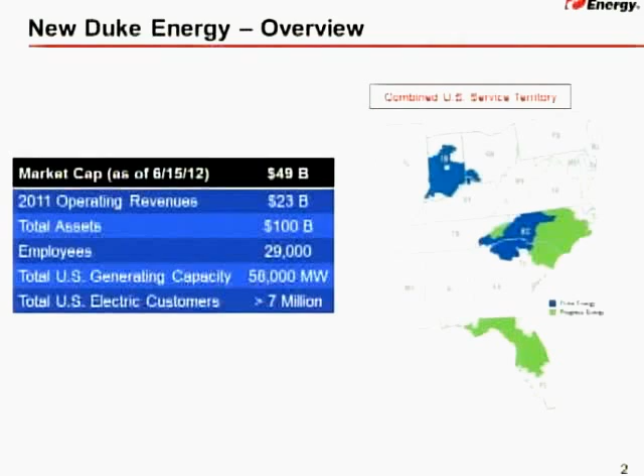Give you a little background about Duke Energy for those of you who may not know who we are. We are a company headquartered in Charlotte, North Carolina. We have recently merged with Progress Energy. Progress was headquartered in Raleigh, North Carolina, to form our new company. You can see the financial numbers there in terms of market cap and operating revenues and assets and so forth. But we have 29,000 employees in our new company. Around 58,000 megawatts of generation.

And really we have a pretty diverse mix of generation. We have nuclear, coal, gas, hydro, pretty good blend overall, gas and coal. A little bit more coal than we have gas, and about 11,000 megawatts of nuclear. We're also in the renewables business, at least a little bit. We have about 2,000 megawatts of renewables generation, wind and solar, across the United States. We're continuing to grow that business a little bit.

We have an international presence. That's Duke Energy International in Latin America, where we operate in 6 or 7 countries down there. Have about 5,000 megawatts there. As the slide says, we have 7 million customers across the U.S., and the map shows our service territory in the U.S. across 6 states.

I mentioned the merger. It's going pretty well. We're about 4.5 months into it now. We are working through the cultural issues that are really beginning. You know, in my experience, a merger of this nature, of this size, it takes quite a few years to really kind of bring the cultures together. We're in the same industry, doing the same business, generating the same product, same types of customers. But exactly how we do things, the nuances, is where you really get into the cultural matters, and we're working our way through that, integrating those cultures.

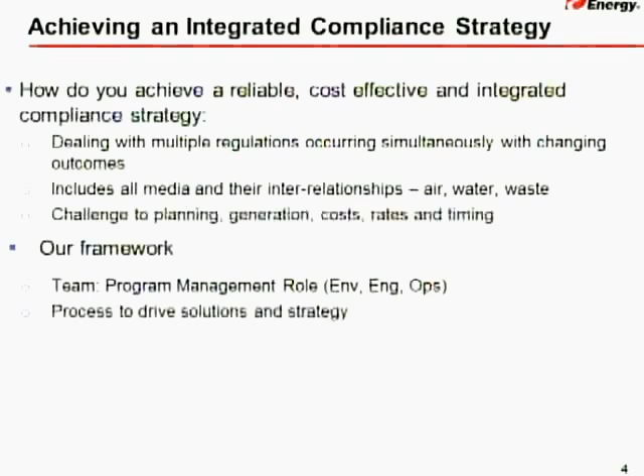I'd like to say we're very fortunate in the fact that I think we've got some very talented folks in our company that we were able to bring together to work on this. And some of the folks are here in the room with me today. I encourage you to seek the Duke folks out and have a conversation with them this evening or through the day tomorrow.

But the team was pulled together to begin looking at this, what was out ahead of us, and to put a process together, a process to drive solutions and a strategy for how do you deal with all these different regulations simultaneously. And this is the process that I want to talk a little bit more about this afternoon. At a high level, this is a summary of that process. This is our compliance planning effort.

But under the assumptions and scenario development, this is where we interpret the regulations and determine possible options and costs of those options and capabilities of those options from a performance standpoint when you're looking at different equipment. We build in, as a second step, the market fundamentals, looking into the future around energy prices, fuel prices, and so forth. We make sure that's baked into our process. Then we do screening models. The screening models really determine the optimal method to make sure that we're outfitting our units correctly, the most optimal approach that we can come up with.

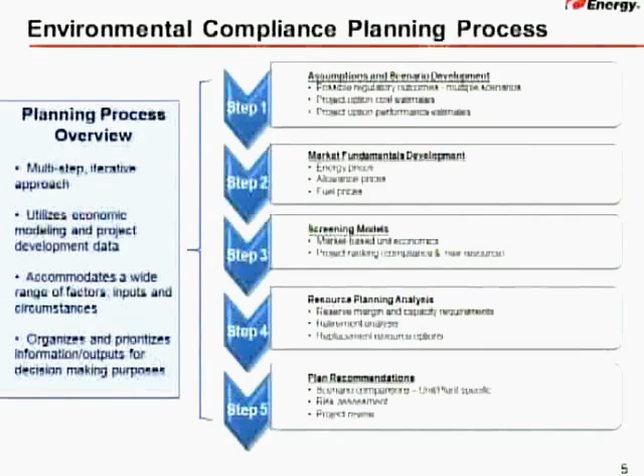And then finally, we come up with a plan recommendation that is designed to determine the least cost, the most feasible plan that considers all the different factors, including the political realities that we deal with around things like rates and so forth. So what I'm going to do is spend a little more time talking about each of these 5 steps this afternoon.

So under the assumptions and the scenario development, interpreting the regulations, kind of reading the tea leaves, we get involved with that early on. Before the regulations are even proposed, we're looking at what's coming down the pike. We're trying to influence that as well through our company, through industry associations and whatnot. But we're getting a glimpse of what the future might look like from a pre-rule standpoint.

Then the rules are proposed. We go back and look at the proposed rules and how they may have changed from what we thought it was going to look like. And then the final rules when they come in, just like MATS did. And MATS changed significantly from when it was a pre-rule and what we thought it was going to look like to the final rule. And that made a huge impact on our compliance strategy around that.

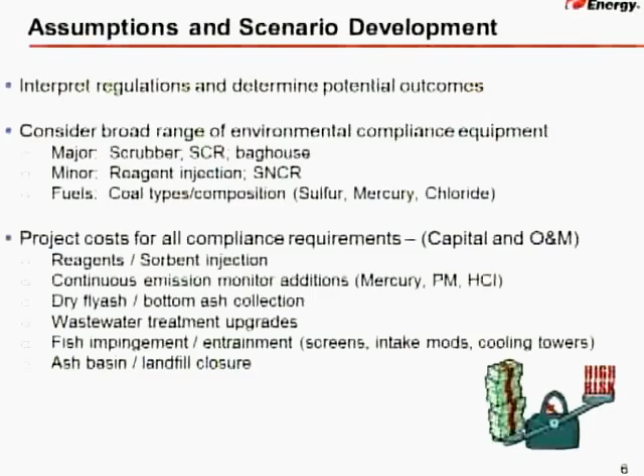As part of this step, we also began considering the broad range of equipment that we need to put on. What's the major pieces of equipment? Scrubbers, SCRs, bag houses. The minor stuff, chemical additives, reagents, and so forth. What types of coal are we going to be burning? We heard earlier in one of the presentations about the differences between the coal makeup from the different basins across the U.S. So, looking at that around sulfur, mercury, chlorides, things of that nature.

Then we start projecting the costs of all these compliance requirements, the capital investments, and the O&M investments. And the O&M investments, we're looking at fixed O&M and variable O&M. You know, fixed O&M like resources of staffing and so forth that you're going to have on site to operate the equipment. Variable O&M, what kind of chemicals are you going to use? Somebody talked about the coal variations as a variable O&M. These are the things you start looking at.

So reagents and sorbent injection, continuous emission monitors, how are you going to deal with your ash? What kind of wastewater treatment options are you going to have to deal with? Around 316B, because we're looking here at all the different regulations, not just the air regulations. So what will we do with regard to fish impingement and entrainment? Screens, modifying our intakes, doing studies to deal with that. And then, of course, ash basin closures.

And as we've looked at this, the ash basin closures, after we're down the road a little bit on our air initiatives, the ash basin closures are going to be extremely expensive in our judgment as we go forward. But the bottom line for this step is we really went through the modeling process to put the information together to really bound our different scenarios. A light case, a strict case, and then a most likely case scenario. And it's the most likely case scenario that we took forward to really look at what the costs were going to be.

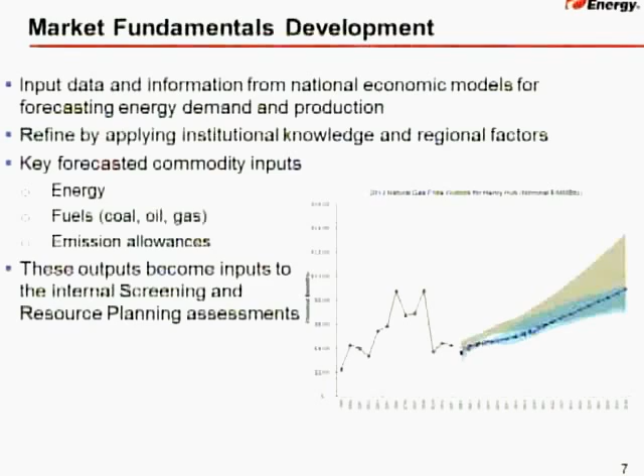But we're looking at the forecasted commodity inputs around energy, fuels, emission allowances, and so forth. What does the future look like with all of that? And then that becomes inputs for the next part of our overall process. This step really helps us determine the value of the asset when it's outfitted in a particular way with particular and specific equipment, and how that relates to the future of dispatching that unit into the future.

And the third step, we're going through a screening process, a screening model, if you will. Again, taking the market information that I just spoke about, but then we're running multiple scenarios through our modeling processes to screen the economics and the new equipment, looking at different combinations, different configurations, what works best for a specific unit. And depending on where the unit is in the United States, the combinations and the configurations are much different.

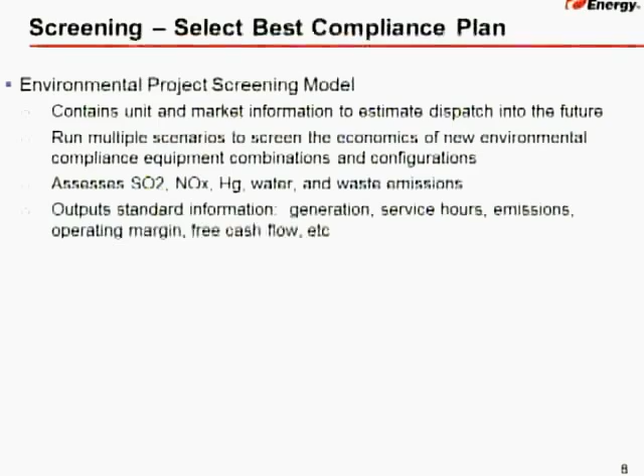We might run 200 different scenarios or iterations around a particular unit, finding different alternatives and alignments that make the most sense. What are the chemical additives that we want to put into the system, and where do we want to inject the chemicals? It allows us to determine the most efficient configuration for a particular unit. It predicts the output of SOx and NOx and water and waste emissions, and it does it in a way that allows us to really understand what's going to impact this unit as we go forward.

The main objective here, of course, is to ensure that the way that we put the equipment on and we run the equipment through a modeling scenario, that it's going to achieve the expected outcome that we need to comply with the regulations. We then hand the outputs of our model over to the resource planning group to do their integrated resource planning to determine if the controls and the configuration that we've identified are really cost effective, or does it make more sense to retire and replace the units with new generation.

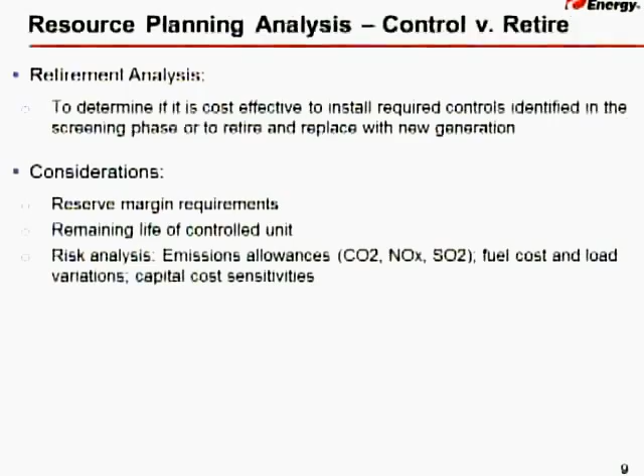They're looking at typical considerations around resource planning, so reserve margins, remaining life of the controlled unit, looking at the various risk analysis aspects of that. But they are looking for the lowest cost, the best option for our customers. Of course, the bottom line is, do you retire or do you control? And then finally, we make the plan recommendation. So the point here is that models don't make decisions, they only inform decisions. And your models are only as good as the information that you put into the models.

At this step in our process, we're pulling all the internal stakeholders together. So we've got our engineering and our environmental folks and our operations folks, but we're re-engaging the folks from fuels and resource planning and legal and accounting, governmental affairs, rates and regulatory affairs, all the different players who are key to help us make the right decision on a unit-by-unit basis. Then we're going back at this point and really verifying again, after we come up with an idea as to what the best configuration is for a unit.

We're getting that information about what's the knowledge that we have specifically about that facility. What kind of operating experience do we have? Are there any specific site-related constraints that we have, construction constraints? Can you really build that baghouse on that site? If you want to put SCR on that site, do you have the space to do that?

We had one situation where we were configuring an SCR and we didn't have the ground to put it on. So at that point, we were deciding to put it up on stilts. And you can think about the costs associated with that, with hovering an SCR above other equipment and the challenges associated with that. But these are some of the things and some of the challenges that we were actually looking at.

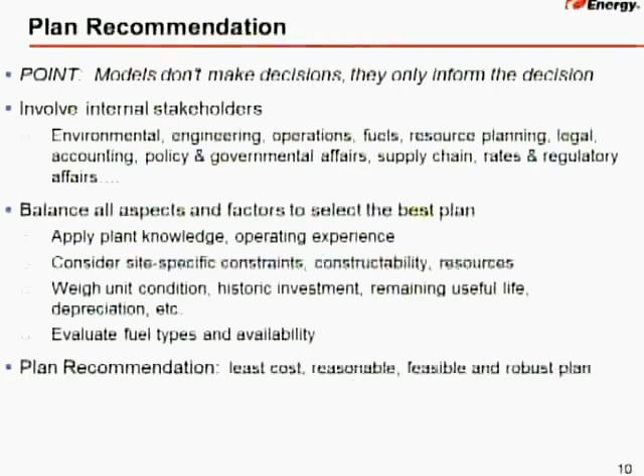The plan recommendation that comes out of this is to find the least cost, the most reasonable, the most feasible, and a robust plan. And when I'm talking about a robust plan, I'm really talking about what is the margin of compliance that this plan for this unit will achieve for you. Are you really close? Or do you have a wide range of compliance there? You need to look at that because you really don't know what's coming down the tracks with regard to future environmental regulations, and that's something you have to factor in.

But you also have to look at the jurisdictional policies and the politics that are going on. It may be different as to what you need to do in Indiana in our situation versus Florida. And you have to look at timing too, as it relates to rate cases and things of that nature.

It's a pretty complicated process. And every step of the way, we have the tools and the means to go back in and run additional iterations, to cycle back and make changes and make tweaks and adjustments as we need to on a unit-by-unit basis, plant-by-plant basis, jurisdiction by jurisdiction. And it's worked really well for us.

Like I said when I started, we still have regulations coming at us. We don't know what the final end game is going to be for many of these regulations. CCR, what's that going to do for us or to us? 316(b), effluent guidelines. With the new administration, still a question mark as to how this is going to play out. Many of us think it'll come pretty hard at us after the first of the year. So things that we thought might be delayed a little bit, like CCR, we think it may come at a faster pace towards us.

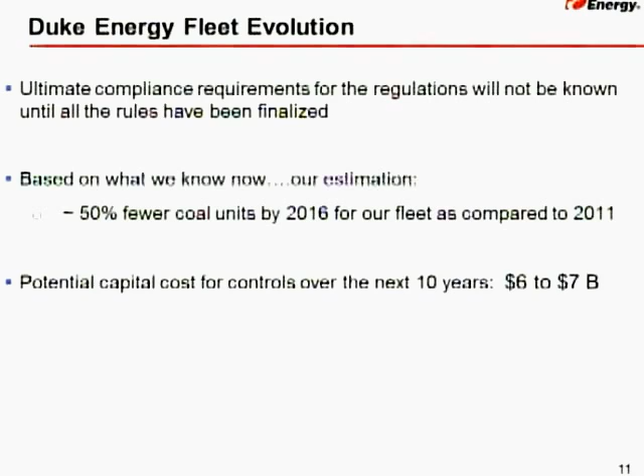We just published our SEC report, our 10-Q, and this is what we had in there. This amount of money was based on the modeling and the screening and everything that I just talked about; we came up with it unit by unit, plant by plant. That's a significant investment going forward, particularly when you look at the fact that probably as of right now, and I'll speak just for the former Duke Energy Corporation, we probably spent up to this point $8 to $10 billion over the last 7 or 8 years coming to where we are today, and the former Progress fleet doing the same sort of thing.

So with that, that's my points for this afternoon. Definitely a challenge ahead of us. We're going to continue to work to do our best to influence these regulations that are remaining, to try to get the most flexible outcomes that we can. But we feel pretty good that our process for determining the cost and what we need to do to put the equipment on has been working pretty well for us in the past. So with that, that's all I have. Thank you.

Anybody have a question? Yes.

Yes. When we retire the units, our plan right now is to fully decommission. That's the path we're on today. Now, I will tell you that at this point, we've probably only decommissioned maybe three plants total of, I'm going to just guess, say 10 units, small units around the U.S. So we've got some experience in that, but our intention would be to bring those units down to ground level, basically, tear them down.

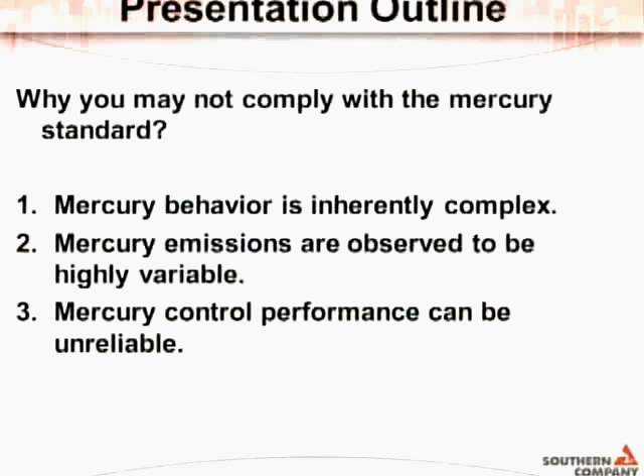Talk a little bit about mercury behavior and its complexity. Now, John had a couple of presentations in the NALCO presentation that had all these equations on it, and I don't want to go there because that would just expose me and confuse you. So I'm going to try to make the complexity part simple, if that's not a conflict there. But there's really two things that we need to think about when we think about the complexity of mercury behavior, or really mercury behavior at all.

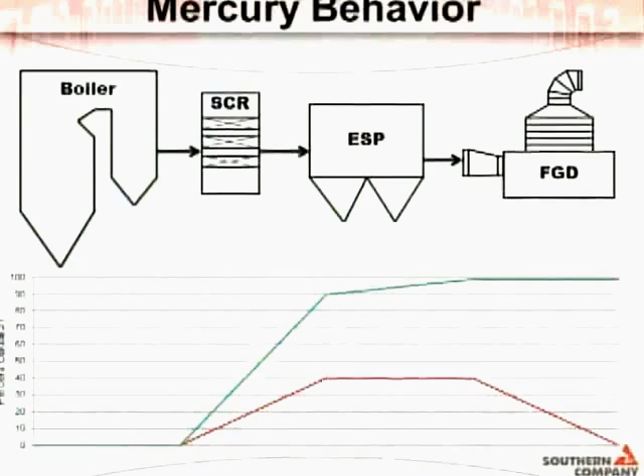SO2 doesn't behave that way, right? SO2 is made in the boiler, and then it just stays SO2 until you get ready to capture it. NOx is made in combustion, and then it just stays NOx until you intentionally do something to change that. PM is released from the coal and stays PM. So we have this odd complexity with mercury that we have to deal with.

So to kind of wrap that up, how does oxidation and capture work? What's really going on in the boiler, as I mentioned? Mercury volatilized into the elemental state, simple. Then the SCR, maybe the most complex piece in the train. What goes on in the SCR is a lot of oxidation, but it's dependent on a lot of variables.

How much halogen do you have in the flue gas? What's your flue gas temperature? What's the activity of your catalyst? How far through the reactor does the ammonia penetrate? There's probably some more, but I think that's enough to make the point that it's really complex what's happening there.

And then the ESP. The ESP can capture a portion of the oxidized mercury. Doesn't mean it does capture it, but it can capture it, and it's also dependent on multiple variables. Temperature, again, plays a role, the properties of ash, how much unburned carbon you have. So you're adding on more complexity.

And then lastly, the FGD can capture oxidized mercury, very good at capturing oxidized mercury, but you have this whole reduction potential going on, the big bad mercury re-emission back to elemental state and out your stack. So the thing that this creates is the reality that mercury capture can range from 0% to over 90% in very similar systems. In plants that deploy the same technology, you can get close to 0% or over 90% control.

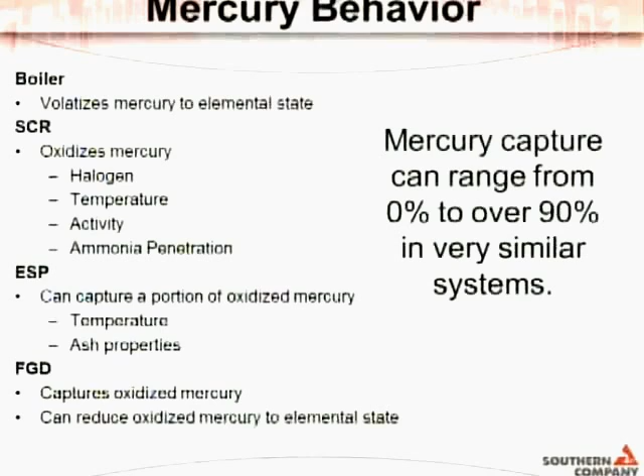And I think that highlights why mercury is different than a lot of other pollutants. There's no plant out there with a scrubber that gets 0% SO2 removal. But there probably are some plants out there with scrubbers that get very close to 0% mercury removal from time to time. So, mercury behavior, very complex. That's sort of my first point.

Secondly, I want to talk about mercury emission variability. If you've had the misfortune of hearing me speak before, this is probably a topic you've heard me talk about. I've carried this silly slide all over the country and bored many people in rooms like these with it. But what we see here is mercury emission data from our units that have SCRs and FGDs. This is CEMS data over several years, and what it shows is the emissions are highly variable.

So what we've done is we've taken actual emission data, and we've calculated 30-day rolling averages, just like the MATS rule would ask us to do, and then we just statistically compare our historical performance to a MATS type of regime. And so you see from plant to plant, there's 7 plants here. We have anywhere from 400 to over 1,000 individual 30-day averages for each plant. If you look at the mean column, the 3-ish year average for all these plants is somewhere less than 1 pound per trillion BTU.

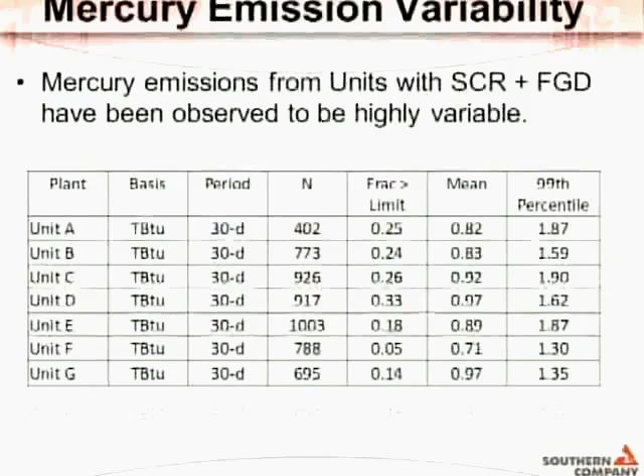That's good news, right? But the other 2 columns are the not so good news. Every one of these 7 plants has had some days in its operating history that are greater than 1.2 pound per trillion BTU. In other words, every one of these plants would violate the MATS limit at some point if we continue to operate them the same way we've been operating them for the last 3 years.

These are not uncontrolled units. These are units burning bituminous fuel with plenty of chlorine, with an SCR, with plenty of catalyst, and a scrubber with plenty of water. And we still are out of compliance anywhere from 5 to over 30% of the time. And what is our maximum emission at those plants? The highest 30-day average that we experience, anywhere from 1.3 to 1.9. So we're not way off, but we're off. And you only have to be off a little bit to create a problem for yourself.

So we observe variability in our SCR and FGD units. The next picture I have here is a histogram, or a distribution of emissions from units with activated carbon into a baghouse. So this is a TOXECON unit. There's actually 3 units here mixed into the data pool, but it's the same thing, historical 30-day averages, just laid out in a distribution. And what you see is, you've got sort of this normal behavior around about 0.8. So on average, the technology easily achieves the standard.

But what we see is this long right-end tail. And that means that we have days, this not normal distribution, where we have compliance issues. And actually, the 99th percentile there is somewhere around 2.25. So we see very similar variability with activated carbon injection that we do with SCR and FGD. So variability isn't necessarily technology dependent, which leads me to believe it has more to do with mercury, less to do with technology.

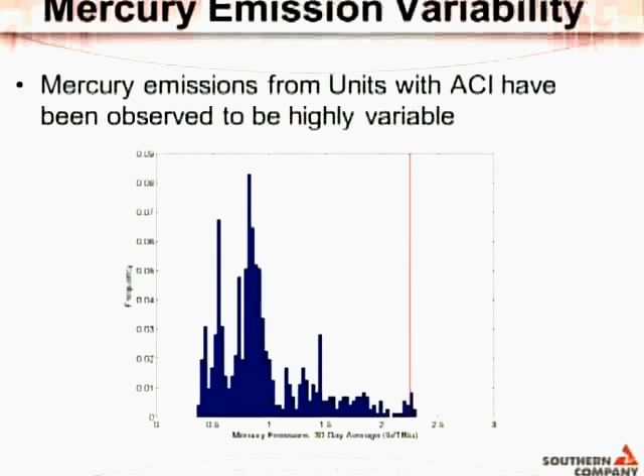The last thing I want to talk about is the control issue. So why would I say that control performance is unreliable? Again, I want to show some performance here on activated carbon, and my point here is that the long-term performance doesn't always follow the parametric trend. So if you've been to a lot of mercury conferences or environmental controls conferences, you've seen enough parametric trends of activated carbon injection that you could draw them in your sleep. You increase injection rate, you increase performance, or lower emission, depending on how you label the y-axis.

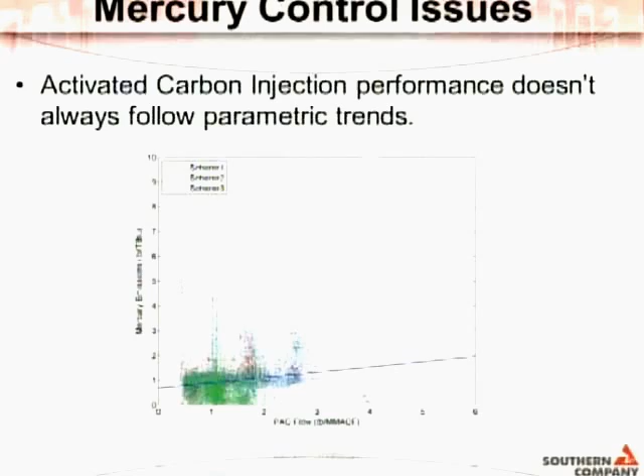Well, what we've observed is that if I want to hit a 1 pound per trillion BTU-ish emission, it takes anywhere from about a half a pound per million ACF of carbon up to close to 3 pounds. And now why is that? I don't know. It's not fuel mercury. Everybody wants to say it must be more mercury in the coal. It's not that. This is consistent PRB coal. The range of mercury in the fuel is very tight. So it's other things, it's process things that drive variability, that make parametric curves only true for a small moment in time in which they were taken.

You could also look at it, well, what happens if I just always inject 1 pound per million ACF? Well, in that case, I have emissions anywhere from 0 to over 5. So if you just hold your injection rate, you might be good most of the time, but you see the scatter of dots up the graph. So we see these problems with long-term performance.

Talk a little bit about FGD mercury capture, and this was hit on in John's presentation earlier. It's really complex what happens in a scrubber. I'm a mechanical engineer by training, so I don't understand it all, except you've got these multi-paths of what's going on. You've got some mercury that just passes right through the water. The oxidized mercury gets absorbed, but then it goes and it starts doing all kinds of things.

It can report to the solids in the scrubber. It can stay in solution, and whether it does one or the other, it may or may not reduce. If it's reduced, it may come out of the scrubber. All kinds of stuff goes on that makes it very difficult to predict what is the true capture across an FGD. Remember, 0 to 90%.

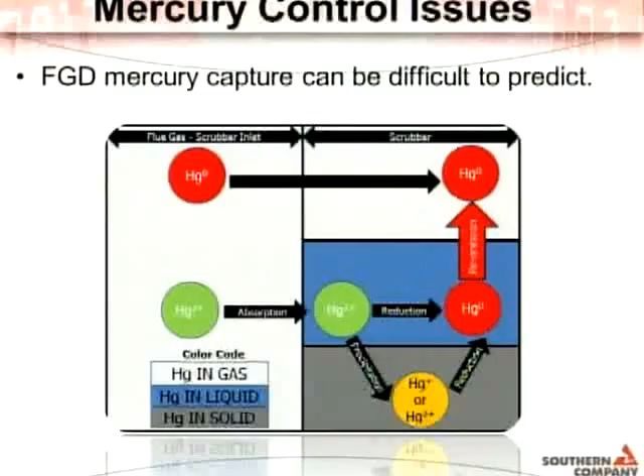So this is a complex sort of thing that's inherent in the control itself, which leads me to the next point, which is that mercury re-emission is a significant issue. It's real, and I'm not sure that there's a proven commercial solution. Again, I'm not saying that any of the technologies that you might hear about here today are bad technologies. I just don't know if any of them are fully proven out yet.

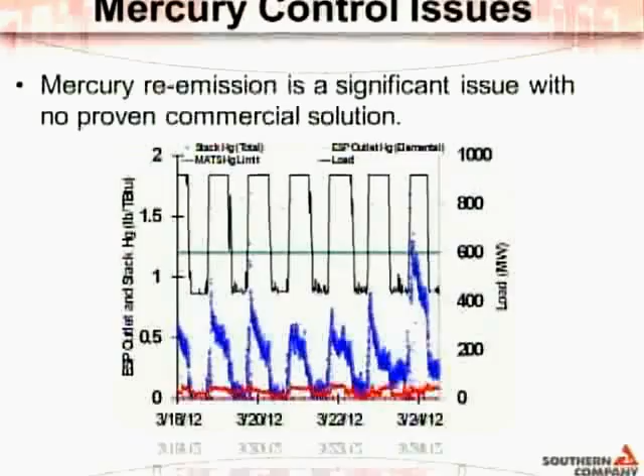This is just a slide that shows mercury re-emission to show that it's a real phenomenon. It's not just something that is academically discussed. But you see the load is the top dark line. So you'll see that the mercury emission actually follows load. The bottom line, there's little dots at the bottom you can't really see, which are ESP outlet elemental mercury numbers. They're almost zero, which means if you're capturing all the oxidized mercury, your emission should be essentially zero.

But you don't. You see this daily peak where you actually have significant emissions, which is re-emission. So we see at this site for this week significant re-emission every day.

Talk a little bit about re-emission technologies. Not very straightforward. We applied a re-emission technology. It's not important what technology it was. Again, it's probably a good technology. This demonstrates that there's some things to be understood about it. You can kind of see to your far left this first re-emission event that goes up to about 6. The inlet mercury to the scrubber is about 6. So you see this event where all of it's re-emitted.

Well, then we start adding the control technology. And because we weren't doing it right, whatever right is, we had these wild re-emission events. So my mercury control technology actually increased mercury emissions. That is a problem. In fact, it didn't just make re-emission the same as it was before. It made it 2 times as bad as it was before.

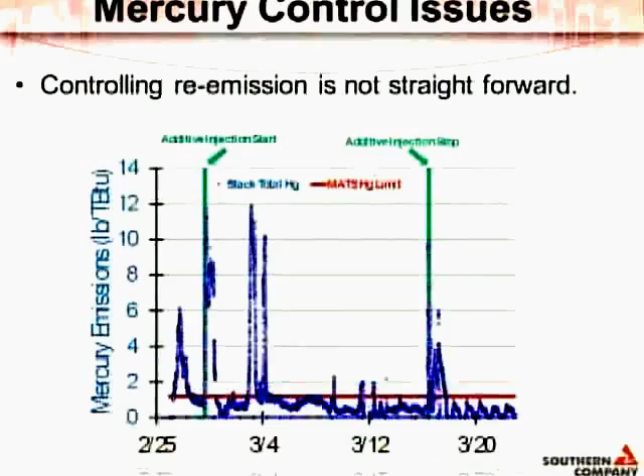Now you see plenty of time period during the control where emissions are really low. So the technology probably works if it's done correctly. And the point is we got to figure out how to do it correctly because it's not straightforward. These aren't technologies that you just turn on and head to the house. So re-emission technologies might not be straightforward.

So what do I want you to take home from this presentation? What's my conclusions? I got 3 here to think about. First of all, you'd be well served if you understood your emissions profile. And that's not very easy because I showed you emission profiles where one plant was above the MATS limit, not really out of compliance because it's data from a period where there was no compliance limit. It was over the MATS limit 5% of the time.

So if you went out and tested, 95% of the time, you would think that you were fine, you were in compliance, your technology was working. Even the bad performer, 60%, 65% of the time, you would think you were okay. You really have to somehow be able to understand what that whole profile looks like.

We had this great resource because we installed mercury CEMS several years ago, so we have gobs of mercury data. I understand a lot of people don't have that, and so you got to somehow figure out how can I really draw that picture? How can I understand what the true profile is? Not just what it looks like today, not just what it looks like for this week, but what is the real profile? What is my minimum and maximum emissions?

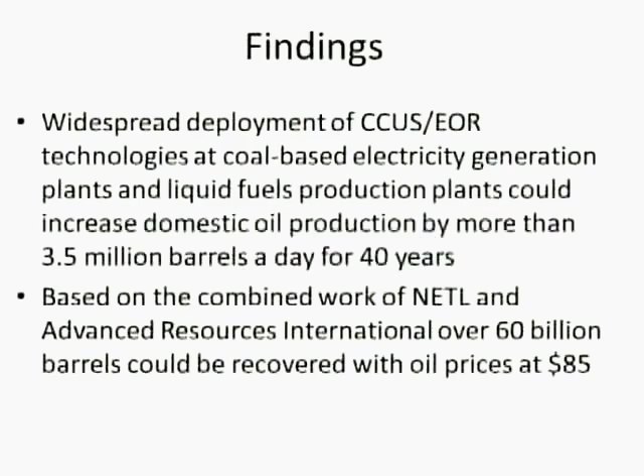And you know what? About 70% of all the oil that was there then is still there. They only took the easy part. John D., you know, when he was living in New York and arguing with the railroads on moving his oil around, Standard Oil of Ohio and all that stuff, it just took the easy stuff. When it got tough, they went down to the easier, more sandy, more porous soils down in Louisiana, Arkansas, Texas, Oklahoma, etc. So we think there's still a whole lot of stuff there.

And at $85 a barrel, we think it potentially can be recovered if you capture CO2 at power plants and put it in the ground and push up the oil, okay? They've been doing it. Denbury, who was a big player in this particular study, has been doing that for about 40 years. They have an excellent business model. They make a lot of money doing it down in the Texas, Louisiana, Mississippi, Arkansas part of the world. But they'd like very much to do it in Ohio, Indiana, Illinois, West Virginia, Kentucky, et cetera.

Because why? What constrains the whole process of enhanced oil recovery is the limited availability of CO2. We just don't have it. And what they use now, they mine. They actually dig down, bring it up, pipe it from Colorado, Wyoming down to Texas and use it. So why not take all the CO2 emissions that we have, capture them, and then use them in enhanced oil recovery? At $85 a barrel, it's attractive.

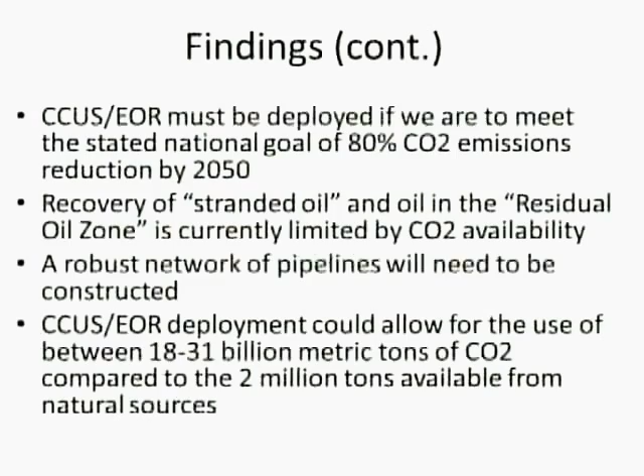The President has stipulated a goal for the United States to reduce our emissions by 80%. Actually, it's 83%, but the 3%, who's going to quibble over that? By 2050, and unless there is a tremendous advance in modern medicine, I won't be here to see that. But you can see that there are opportunities in terms of recovery and in terms of using CO2. We have a lot of billions of metric tons of CO2 available. Currently, we only use about 2. So there is potential for great increase.

We could also provide about 30% of our nation's liquid fuels by 2035. Right now, that's not a very viable economic plan to convert coal to liquids, but you certainly can do it. The Germans ran their whole World War II effort on it, and the South Africans truly are leaders, and they're exporting it and licensing it in China even as we speak. So it is doable. It is a question of dollars.

But if we did it and we created a way to reduce and capture CO2 emissions, which I've got Stu working on even as we speak, to get that down to something feasible that we could afford, you could then create a robust system of pipelines similar to the airline system of hub and spoke. You could have smaller pipelines to one big facility, and then you could pump it from that facility in transcontinental or at least long-distance pipelines. We know how to do that.

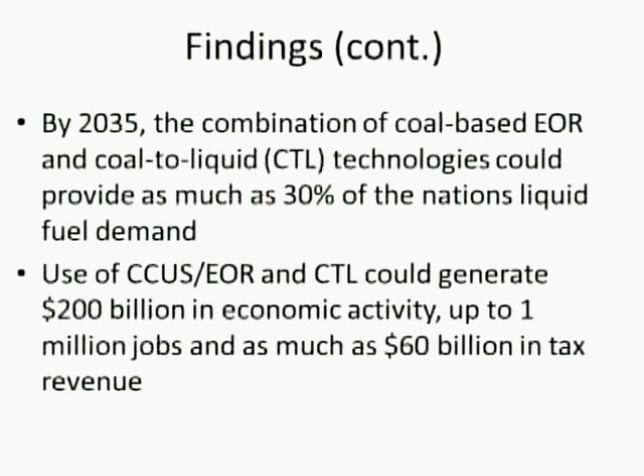We can do it. It would put lots and lots of people to work, not just in the highly skilled jobs of engineering and what have you, but also in the construction, the operation, the monitoring, the security systems. All of those kinds of things are available, and this is the kind of thing that we think could be in place by 2035, certainly out to 2040, 2045, and 2050.

So that's it on that particular thing, and I'll be happy to take questions about the actual study itself, but as I said, there are 200 pages of actual text with another 70 pages of appendices attached on the website. It's all one word now, nationalcoalcouncil.org. Click on the information button, click on the studies for download, click on this one, Harnessing Coal's, et cetera. So that was part of what I was asked to do, is what is my vision of the coal industry by 2035 or so.

The vision is robust, to say the least, because in order to do anything in this country to control CO2 emissions, you're going to have to do it across the board on all fossil fuels. In the first quarter of 2012, the electricity generation portion using natural gas for the first time ever emitted more CO2 than did the coal portion. Now, we're not happy about that because that means our share of generation went down and theirs went way up. But it's a fact that eventually we're going to have to put CCS and hopefully CCUS on a lot of power plants. Again, you've heard retirements, 40, 50, 60 thousand megawatts.

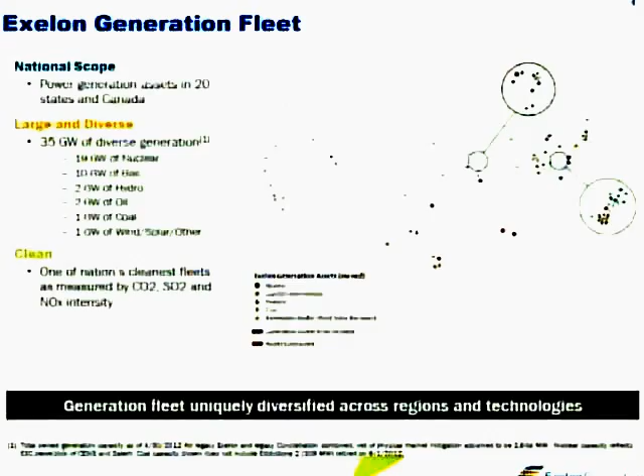Now, we have some challenges. Our newest nuclear power plant is older than the oldest nuclear power plant in South Korea and China. We are having problems with our fleet aging. The other issue that we're starting to have: in many cases, single unit nuclear power plants are not nearly as cost effective, and consequently, with some of the challenges we're getting in marketing and natural gas, it's difficult to make a good return on those.

A new nuclear power plant like at Victoria is such a big bet. You know, even with our market size, capitalization, the new nuclear power plant would be about half of our market cap. It would take about 5 to 6 years to come online. Huge bet for any CEO that would want to make that kind of investment. The other thing that's happening is when we start looking at these small modular reactors. They're great technology.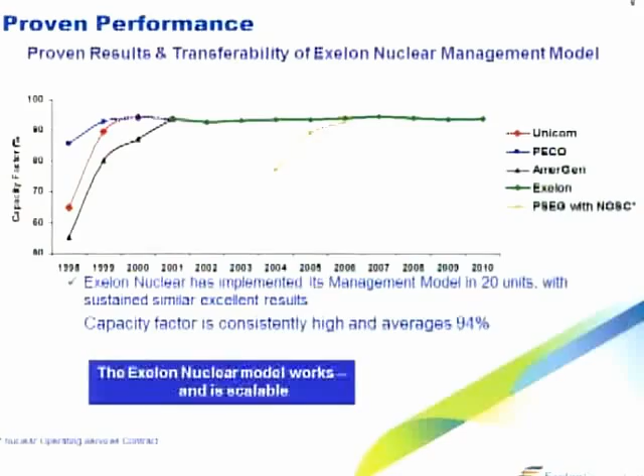When I first got really interested in carbon capture and some of the technologies that Mark's going to talk about today was when the DOE first came out with the ARPA-E program. I noticed that NALCO is one of the sponsors, but Argonne Labs and NALCO were looking to get some grants, and they asked us to get involved. The program they were going after was resin wafer electrodeionization of flue gases for carbon capture. And it really opened my eyes on what was possible.

That research went on fairly well. It made some important contributions. But there was still this problem of how do you make it efficient enough to really make money. And then when I started seeing what was happening with NET Power and how you could have that efficiency, have the fairly low cost for building out the plant, and have the ability to not only capture the carbon, but put it into some other process, whether it's oil recovery or growing algae for biofuels, got me really interested.

And I'm going to turn it over to Mark to go over the technology slides for how NET Power works. Thanks, Steve. Appreciate it.

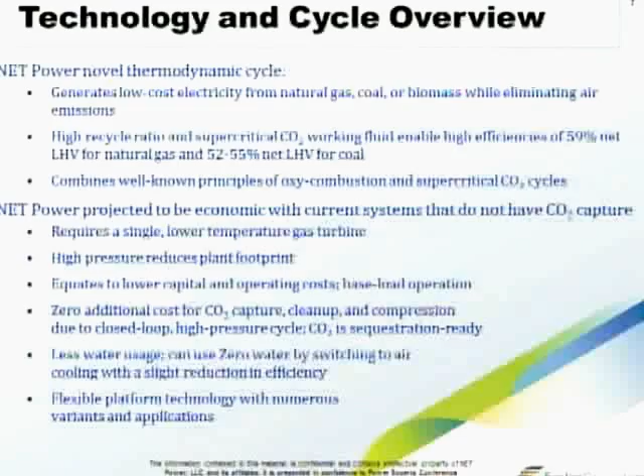So what I'm going to be talking about today is, I think, good news for the entirety of the industry, potentially with one exception, which are the vendors out there talking about control technology. Because what we're talking about today, and hopefully in the larger perspective of things, people will jump on board and realize what a positive impact this technology has potential for. What we're talking about is a thermodynamic cycle, which is transformational to the industry in terms of the core technology, and if it bears itself out in terms of cost, it's transformational in terms of how we create electricity going forward.

Exelon is an unregulated utility, which means when we look at building new generation, we're looking at doing that with an economic signal that would allow us to do that. So our bar is a combined cycle unit, the next technology that one would build, especially in this gas price environment. So that becomes the bogey that NET Power compares itself against in terms of the aspirations of what we want to do with this new technology.

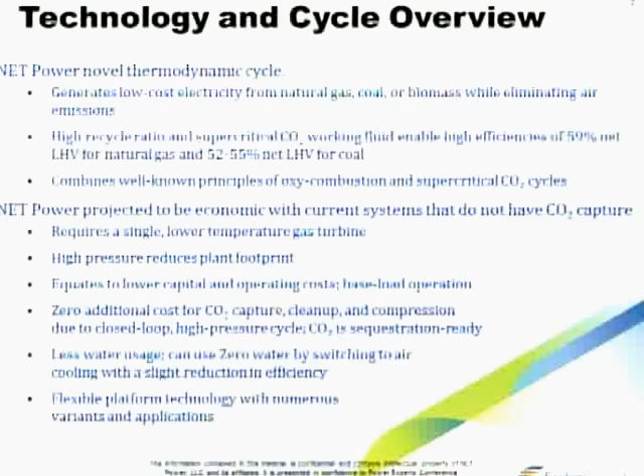It's low cost, uses natural gas, can use coal or biomass, but we'll get into the variations of that. High recycle of the CO2. It's using supercritical CO2, and it's an oxy-combustion process directly using oxygen, thereby eliminating a lot of the issues around having air in your combustion cycle. Key aspects about the technology, which I'll go through in some additional slides after this, are listed out here.

You get a lot of benefits in terms of the capital, because you're talking about a single gas turbine, and you're talking about low temperatures. Obviously, in the combined cycle space, the benefits, as we've seen going from the 6,800 higher heating value heat rate down to 6,300, have been coming with these higher temperature alloys and higher flame temperatures associated with them. We're also talking about a higher pressure working fluid, which enables us to have a smaller footprint.

The lower capital and operating costs, and the potential, as previous speakers, Robert, pointed to, of CO2 use for enhanced oil recovery, allow more of a baseload operation, which further improves the economics. Like most technologies it can use water cooling, and actually, because it's combusting with oxygen, water is one of the byproducts, so it's actually creating water.

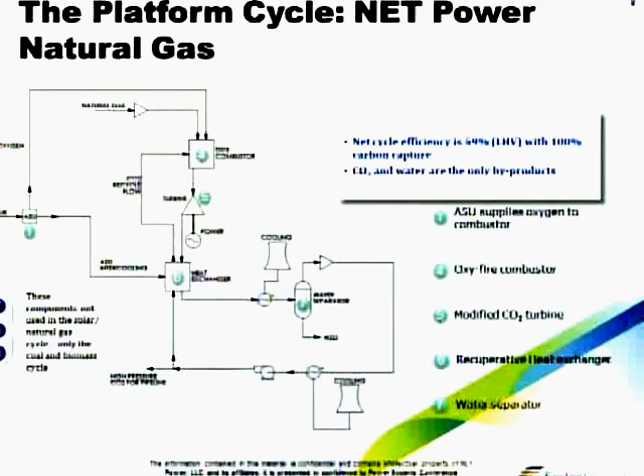The objective in terms of cycle efficiency is 59%, and that's the lower heating value, just to make sure that we're all clear on that. 100% carbon capture. This is a rough sketch of the work that Toshiba is doing on designing the two critical components, this combustor and turbine. When they're designing this, they're focusing on the pilot plant, so not necessarily optimizing for the 25 megawatt size. They're optimizing around creating demonstration equipment that they can then scale up to the commercial size, the 250 megawatt turbine.

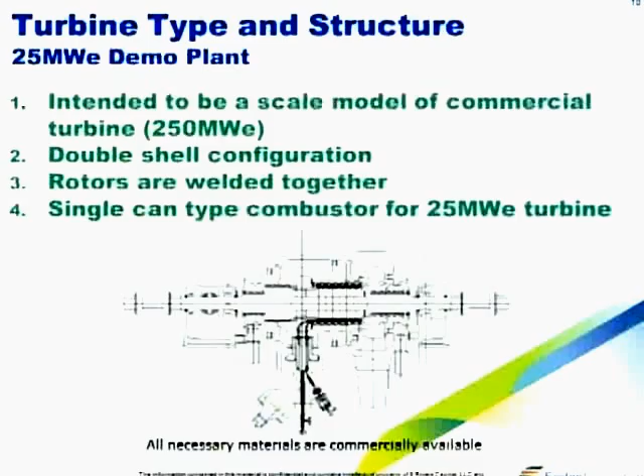The other applications associated with this technology are listed out here as well. This consortium is focusing on using natural gas as the fuel, but as one can recognize, you dig into the technology, being able to gasify coal and gasify biomass, that can then be used as fuel as well. Obviously, you're not going to get necessarily the same efficiency because of the gasification impact on efficiency. You can also use the technology as a topping cycle on top of any of your traditional units.

And for the heat required for regasifying liquid natural gas, you combine this facility with the necessary heat for that. That heat can then improve the efficiency from that 59% to 67% for this cycle. If you co-locate it out in West Texas or some of the other places that our previous speaker, Robert, was talking about, harvesting CO2 from places in Denver and Wyoming and sending it down to West Texas for enhanced oil recovery, you can co-locate this facility right there at the fields and get improved economics associated with not only the value of the CO2, but also the thermal aspects, the gas that comes off as a byproduct of the oil.

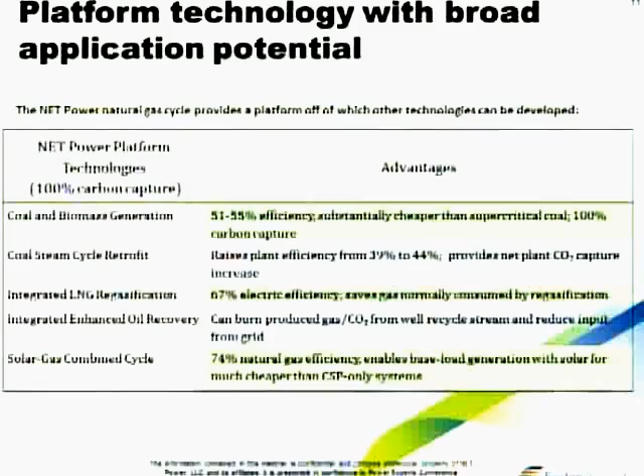And you can also combine this with solar technology and use solar as a supplement to the natural gas as a fuel. And that solar also will improve the efficiency. You have to make the efficiency and the capital work simultaneously. So this is another slide on the efficiency aspects. The target efficiency for the base technology is 59% using natural gas, using coal, 55%. Compare that to what's out there currently with zero carbon capture. If you then layer on converting these technologies to have CO2 at the same level of quality as coming out of this system, their efficiency is further degraded. So you have a better, demonstrated efficiency of this technology over those.

What's driving a lot of that efficiency and capital improvement is that you're fundamentally using higher pressures, leading to smaller components. A lot of the components that you traditionally associate with a power plant aren't there, obviously the steam turbine and all the piping associated with the HRSG and so forth that you'd have for a combined cycle. You do have the air separation unit, which is an added capital item that offsets that. But there's significantly reduced complexity associated with the cycle that we're building a pilot plant around. The footprint is considerably less than a combined cycle, which translates into potential benefits around modular construction, manufacturing larger, more complex systems in the plant and not out in the field.

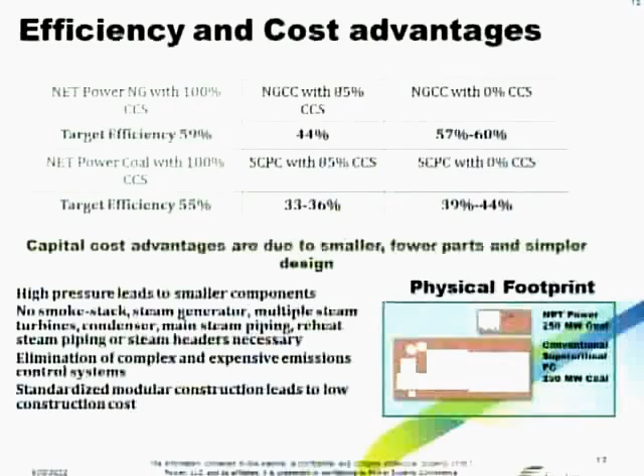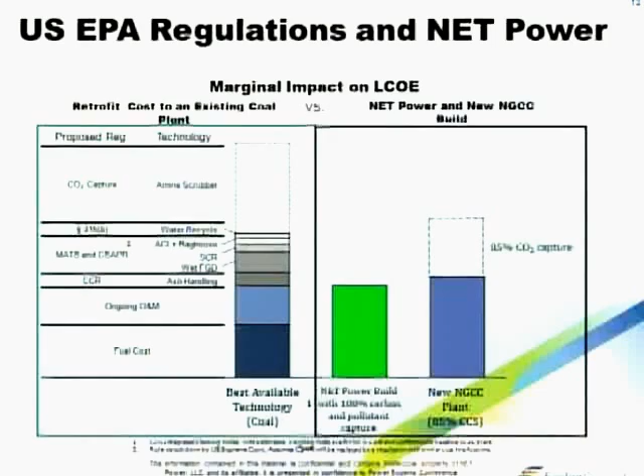So in terms of actual next steps associated with what this team is working on, the general objective is broken up into two buckets. The team is working on a pilot plant for which we're doing the design this year. Most of the construction in '13 and '14, and then looking at operating in later '14 and '15, again for this small 25 megawatt plant. And in parallel to that, as time and resources allow, the team will be looking at applications outside of using natural gas as the fuel for the technology.

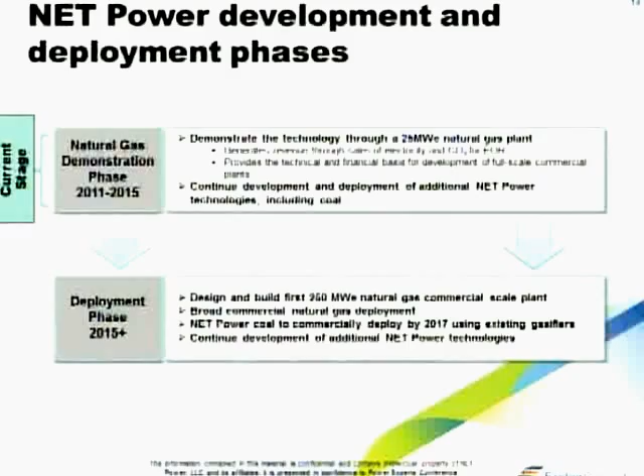Looking out into the future beyond that, then you take the learnings from the pilot plant, translate that into scaling it up to the 250 megawatt plants, and begin to build out those commercial units to the extent that we can demonstrate again that the efficiency and capital cost components have met the targets that the team has laid out. And also build out the other uses that I went through in the previous slide.

In terms of where we are today with the team, the objective, let me first say, for the pilot plant is to not only build it, operate it, but get some continuous operation out of it to demonstrate that you have degradation which is on par with what you'd see with other technologies. And also, when you have that pilot plant, you can do all the system testing. You can make sure that you've got the right understanding of chemistry, the right understanding of operations, the right understanding of safety and the safety aspects that are critical to a new technology, and begin to optimize your cycle from there.

Where we are today in terms of the team objectives, obviously this consortium was put together this summer, and an agreement was completed over the summer. The pre-FEED, essentially the engineering design study, is now complete. Toshiba is well on their way in terms of designing the combustor turbine, and in December anticipating a combustor test. We'll see what those results get us in early January. That's my presentation. Questions?

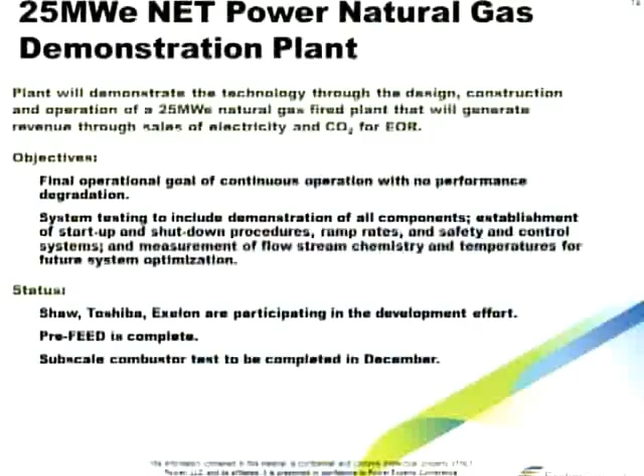Yeah. Can you comment on 100% carbon capture and what is the cost adder? The cost adder for 100% carbon capture. The cycle produces what I would call pipeline quality CO2. So there's no additional cleaning, pressurization, anything else, because the cycle itself is CO2 in that cycle.

So your turbine is rejecting then into pressurized CO2? Like, are you guys going to take it into low pressure and then pressurize it, just tracking it efficiency-wise, because you're not injecting it into the atmosphere? Because I know a regular combustion turbine exhausts essentially to the atmosphere, so this you'd be going into some back pressure. Yeah, the bottom cycle I think is at 30 bar. The issue there at the lowest pressure point is it's actually not liquid, so compressing it back to liquid and then pumping it up is more efficient. But yeah, it's a closed loop cycle.

Yeah, so just to your first question, it's a closed loop cycle, right? The critical aspect about this is making sure that CO2 remains in the system in the flow. So there is no outlet out into the air. I guess what I'm saying is you're going to take a little bit of an efficiency hit, because if I take a turbine and just exhaust it to the atmosphere, that's lower pressure than putting it into a pipeline.